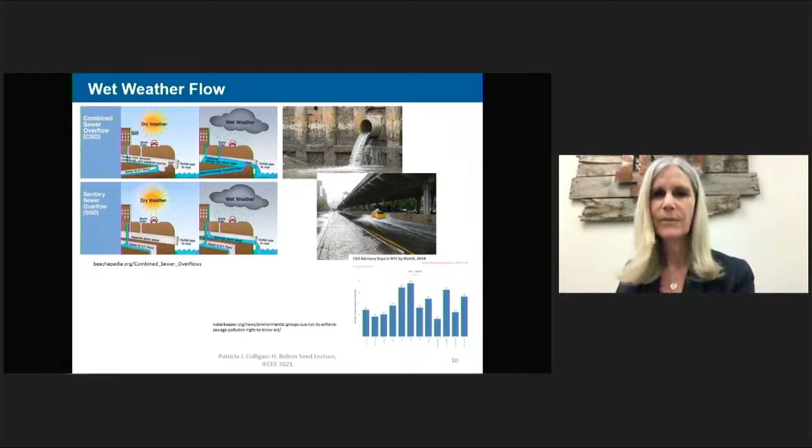One solution to the stormwater management problem that has gained popularity in the last decade or so is urban green infrastructure. Can we restore the pre-development hydrological cycle in our cities by increasing vegetation in our urban landscape? Increased vegetation will allow precipitation to be infiltrated where it falls and prevent the runoff that leads to urban stormwater

management issues. New York City, where the work I am going to describe took place, has embarked on a very aggressive green infrastructure program to deal with urban stormwater management issues, and in particular, the pollution caused by combined sewer overflows. To date, the city has invested $1 billion in over 11,000 green infrastructure assets with a goal of reducing combined sewer overflow and the attendant contamination by 1.6 billion gallons a year.

Although I'm going to be focusing on green infrastructure for urban stormwater management in this talk, there is also increasing interest in green infrastructure programs for climate resiliency. This is particularly in the face of increased wet weather flow under climate projections and hotter urban environments, in addition to the potential for green infrastructure to lower building energy demands and reduce water energy costs, and at a larger scale, possibly contribute to coastal resiliency in the face of rising sea levels.

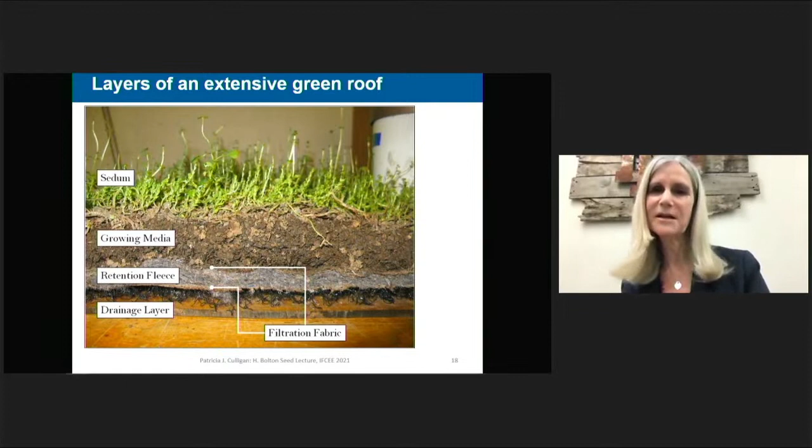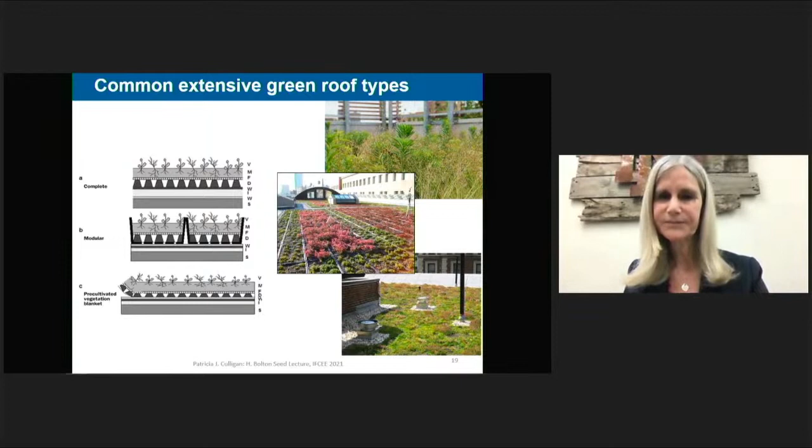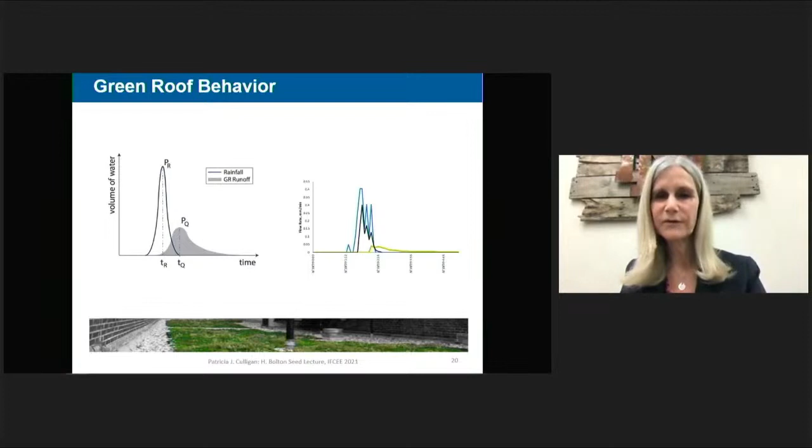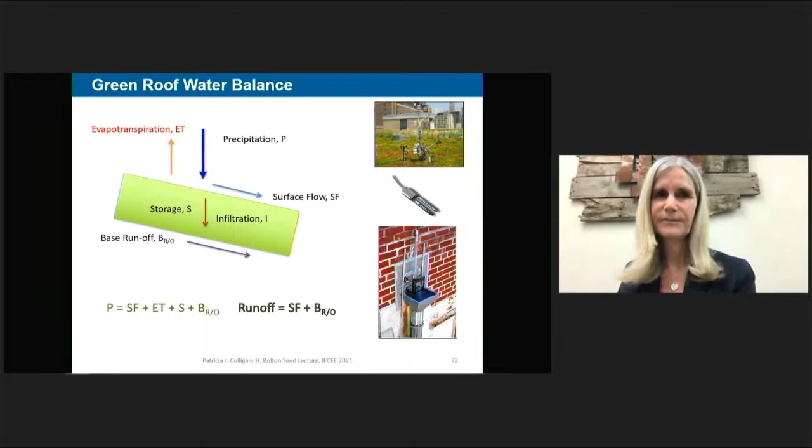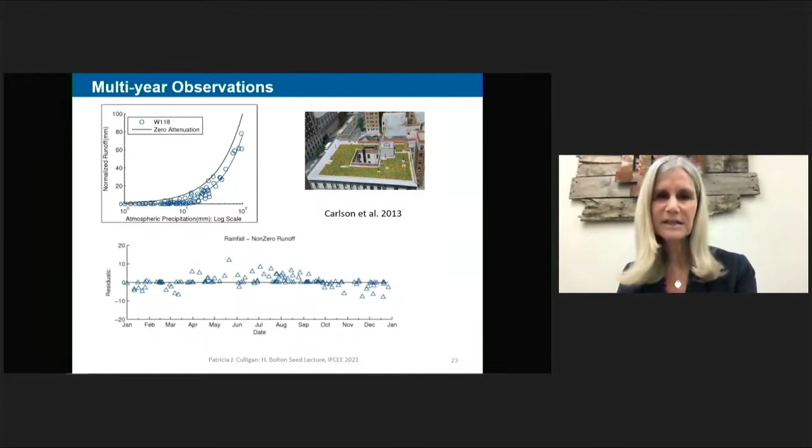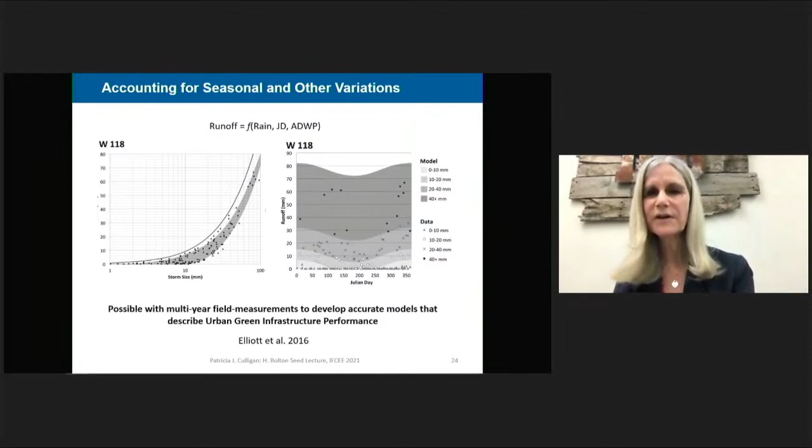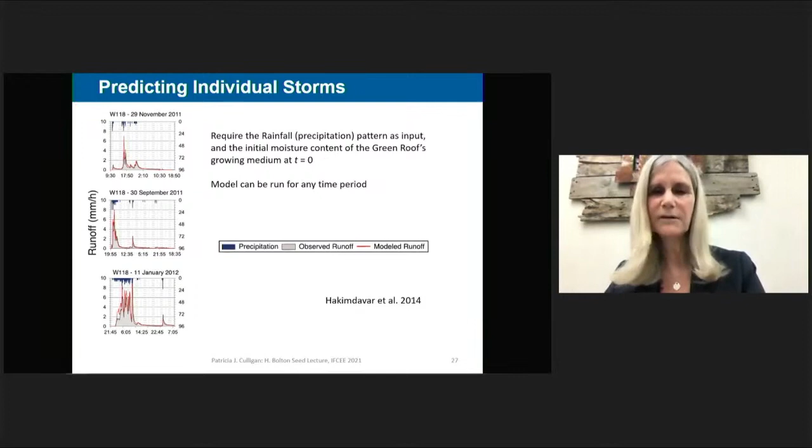It's possible to run the HYDRUS model for multiple years, as long as you have an initial condition, which would be the moisture content in the roof at the start of your modeling, and the input conditions, which would be the rainfall events themselves. We ran HYDRUS for a year of rainfall events and compared the model output to our field measurements.

We've actually explored the use of multiple models to predict green roof runoff. In addition to HYDRUS, we've looked at how HELP, Hydrologic Evaluation of Landfill Performance, which some of you may be familiar with, how good HELP has been in predicting green roof runoff. We've also looked at SWMM, Stormwater Management Model, which was specifically designed for modeling stormwater runoff, as well as a curve number approach.

We found that the main barrier to accurate predictions from any of these models is describing the evapotranspiration behavior of green roofs or any other green infrastructure system, and the unsaturated flow dynamics. In many cases, these models actually use empirical relationships to describe evapotranspiration or unsaturated flow dynamics. And it's actually hard to parameterize these empirical relationships. And even if it's possible to parameterize them, as we did with our use of HYDRUS by using pressure plate testing in the lab, these parameterizations often don't capture the full complexity of these complicated processes.

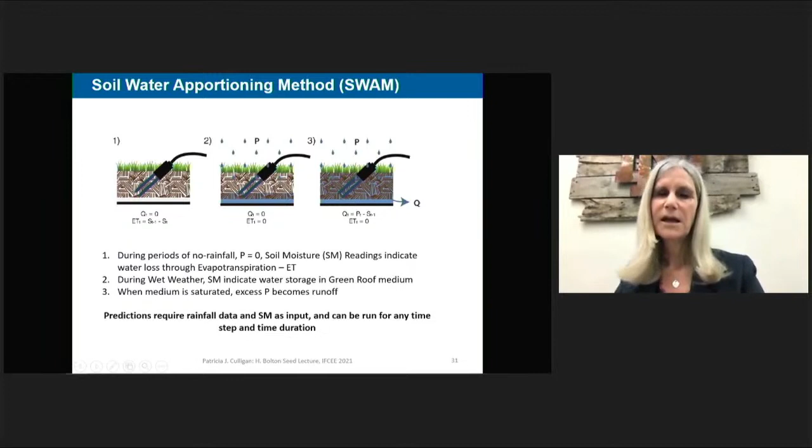However, when it comes to predicting more intense storms with greater rain depths or higher rainfall intensity, SWAM has greater errors. Because we're expecting more intense storms under climate change predictions, there is a question about how accurate this method might be under a hydrological regime where we have larger rain depths and greater intensities.

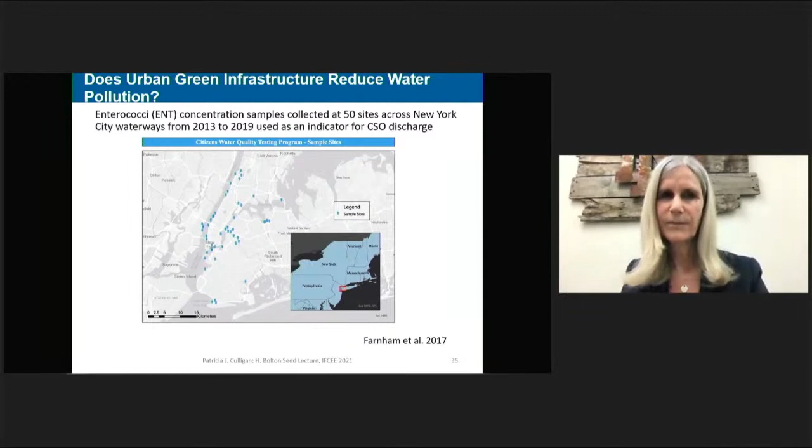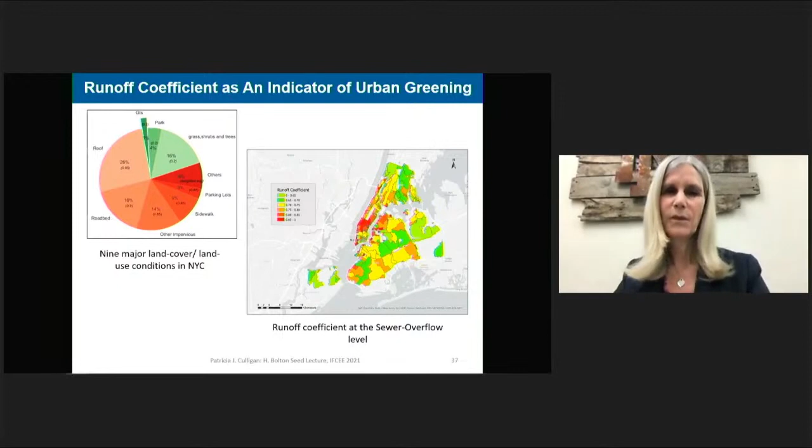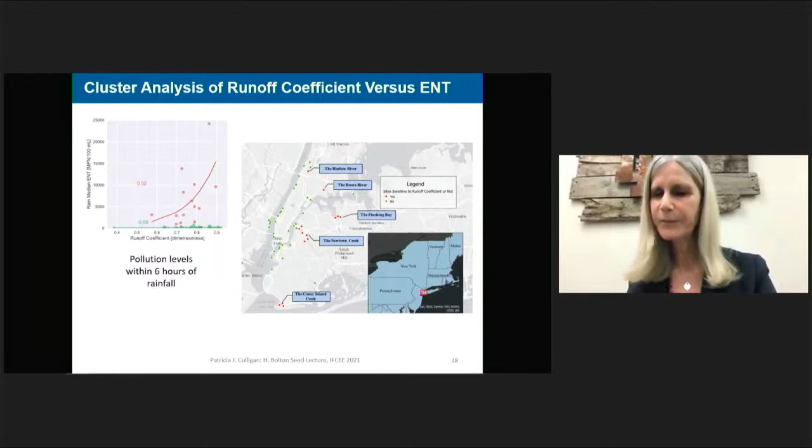We used a random forest machine learning algorithm to predict swimmability at the 50 water sampling sites using the 7-year data set of bacterial measurements. Some of the data sets we used to calibrate the model as a training data set, while the others were used as a predictor so that we could understand the accuracy of our model.

We found that the runoff coefficient, so urban greening, did make a difference. It's actually ranked 4th out of the top 5 predictors of our model, but it only made a difference in cases where combined sewer overflow was injected into the slower moving water bodies.

The top predictor was current or water body speed, with lower speeds being associated with less swimmable water bodies after a rainfall event. The area of the land that was draining into the water body during a combined sewer overflow was also a predictor. A larger land area meant less swimmable. The population of the area and also the depth of rainfall in the prior 18 hours were also good predictors of swimmability.

This model is actually 84% accurate at predicting swimmability of water bodies after rainfall based on the 50 collection site data and the 7 years of data.